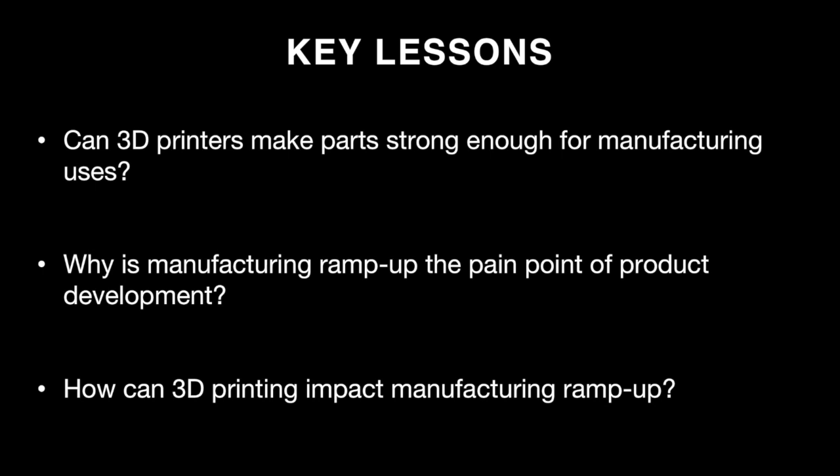The goal of this webinar is to help you understand where 3D printing fits in with regards to preparing a manufacturing line for production. We're going to look at 3 key points: how 3D printers can make parts strong enough for the manufacturing line, why manufacturing ramp-up is the pain point of product development, and how 3D printing can help resolve those pain points to streamline the ramp-up process.

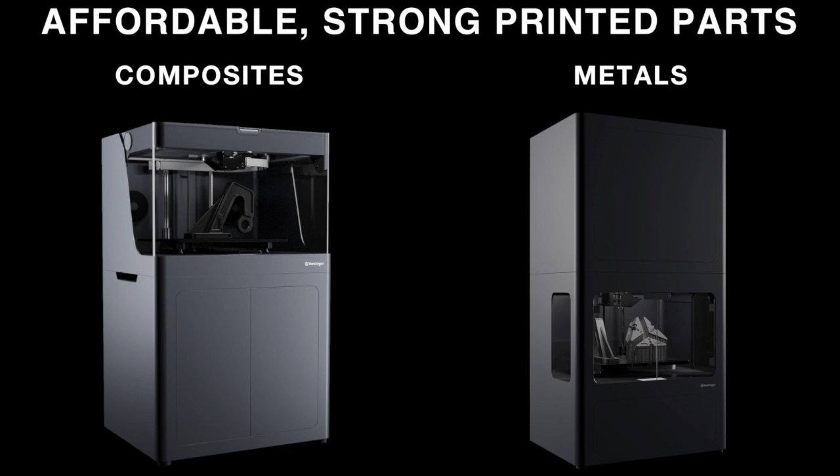First, we're going to go into why 3D printing can be used for manufacturing. A lot of the materials and tools used in manufacturing need to be very tough, experiencing repeated impacts, high temperatures, and lots of wear. Since 3D printing has been around for decades, many people have out-of-date impressions that it's either a cheap way to make fragile parts or a prohibitively expensive technology. Markforged is upending those perceptions by selling affordable 3D printers capable of producing parts tough enough for manufacturing environments, with both metal and composite 3D printers capable of producing high-strength parts affordably and quickly.

So what do we mean when we say strong? Markforged metal printers print parts with strength comparable to that of their base material, 17-4 PH stainless steel, as you can see on the right. On the left, our composite printers are the only 3D printers on the market that embed continuous reinforcing fibers during the printing process to make parts that are 23 times stronger than ABS. This is just as strong as 6061 aluminum.

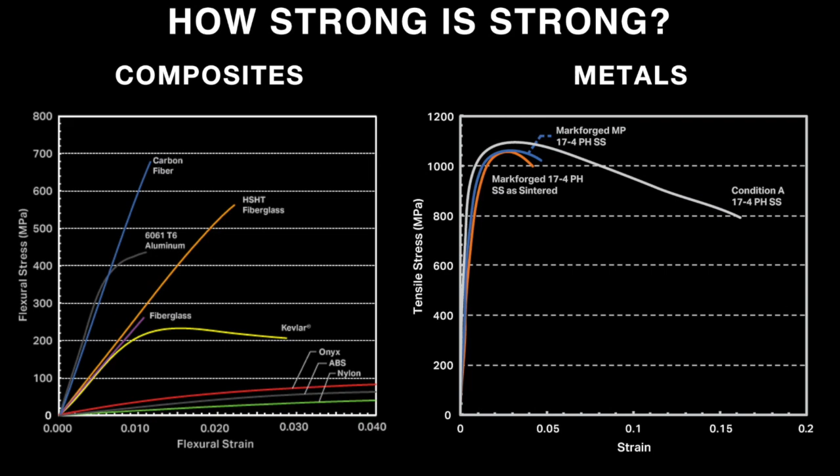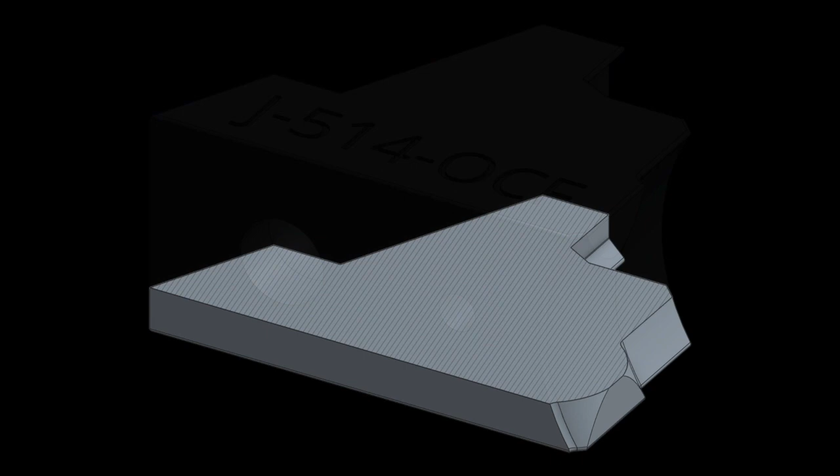Let's take a closer look at how this works. Here's an example of a customer of ours. They use composite 3D printed parts as end-of-arm tooling in their manufacturing automation cells. These gripper jaws experience repeated high-impact loads as they close around thousands of parts a day. Here's the model of the part, and we're going to take a cross-section of this part to show you what our printers can do to it internally.

Here's the cutaway view of the part as shown in our slicing software to describe how our printing process works. There are 2 materials at play here contributing to the success of the part. The white lines forming the shell and matrix of the part are a nylon chopped carbon fiber blend we call Onyx. This material is non-marring and chemically resistant to coolants and machining fluids found in manufacturing. The yellow lines encircling the perimeter of this part represent the embedded continuous reinforcing fiber. In this case, it's Kevlar.

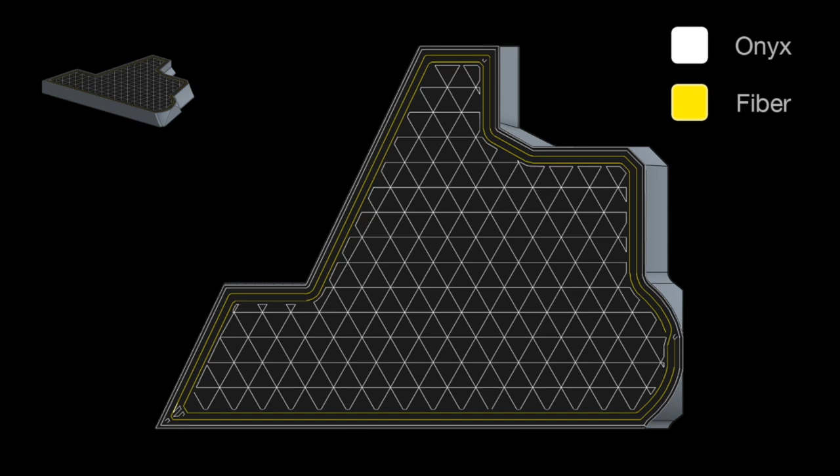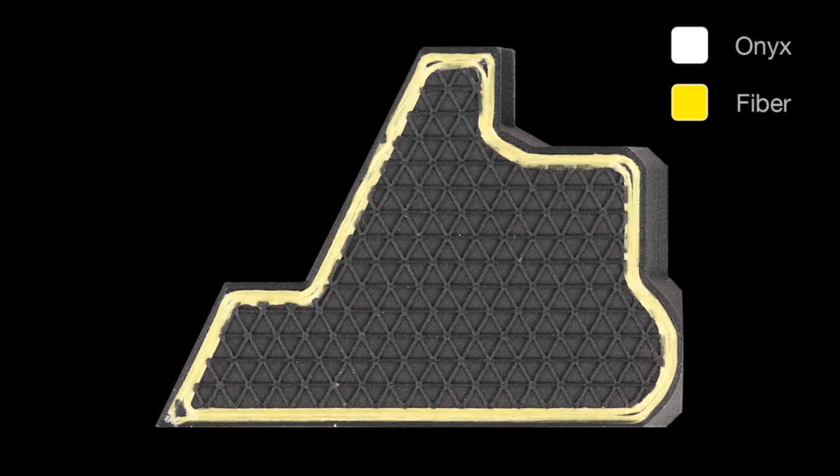Here we have that same cross section but with the real part now, so you can see what that Kevlar looks like in reality. The Kevlar is a continuous strand woven around the perimeter of the part. You can customize these reinforcing fibers and how they're laid out within your part to suit your strength needs depending upon your application. Here we've chosen to reinforce the shell of the gripper jaw because the load from the grippers gets applied on the gripping face of the jaw. The Kevlar fibers on every layer absorb this load by distributing it across the continuous strands, so the continuous strands are the key players in part strength.

With different fibers and different reinforcement patterns to select from, you can optimize your printed part for its loading condition. With these high-strength 3D printing technologies put to work, our customer base has become worldwide, with local service and support from our network of value-added resellers. Our products are trusted by industry leaders in many verticals, ranging from manufacturing and automotive to consumer electronics. Our printers help these companies bring their products to market faster and cheaper by accelerating their manufacturing development process.

Now that we've explained why 3D printing can print parts strong enough for demanding manufacturing environments, let's dive into the pain points of product development. Hardware development starts with a concept. You've identified a need and envisioned a solution. You then take that concept and prove it out with a physical prototype.

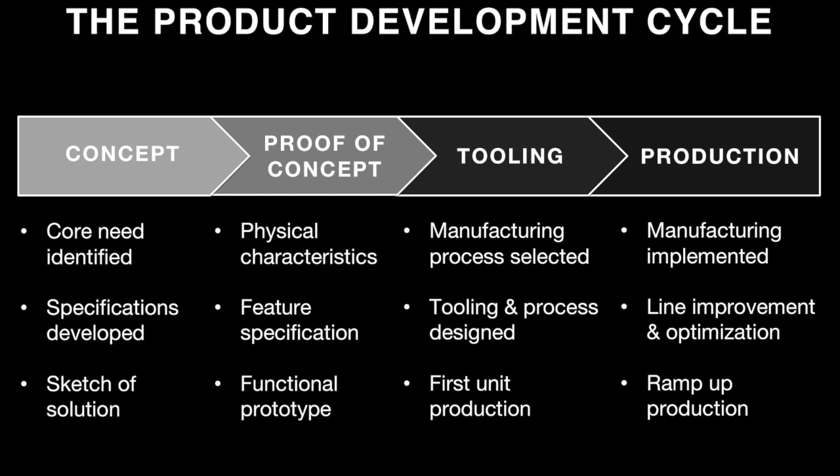Once your prototype looks and acts like you expect, the next step is tooling development. This is where you need to take your single model and figure out what is needed to make hundreds to thousands of it. You need to design your tooling and process to successfully produce your first production unit, and then launch production where you can focus on product and line optimization to increase yield and make more money.

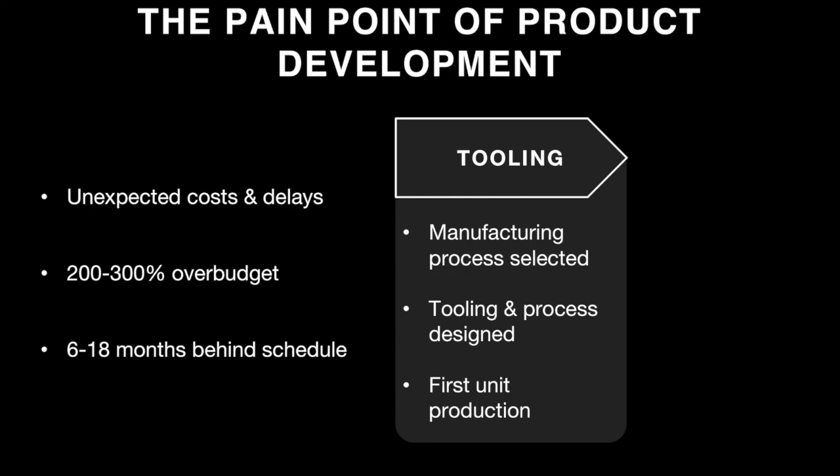So the real pain point of product development is tooling. Ramping up the tooling for your manufacturing line is laden with unexpected costs and delays, is usually 200 to 300% over budget, and can be 6 to 18 months behind schedule. As a result, tooling becomes the most arduous and least efficient aspect of moving your product from your prototype to your production run, and no hardware product is immune to it. Let's dive deeper into why that is.

Here's an ideal workflow for production line development. Numbers and steps can vary quite a bit depending upon the industry, materials used, and the size or complexity of the product that you're making, but these examples should give you an order of magnitude sense for how cost and time distributes in tooling development.

First, you make your forming tools: injection molding, die casting, stamping, things like that, often forming the largest parts in the product like the casings or the housings. These are often the most complex parts of the product.

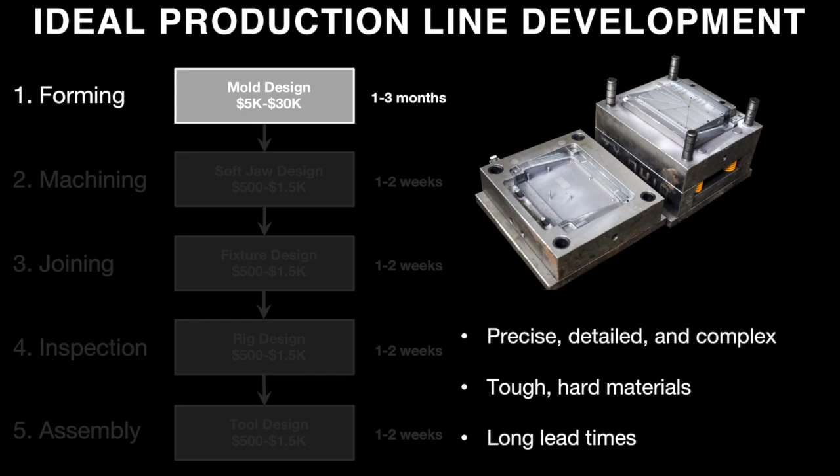Tooling for this step is usually expensive and time-consuming. Parts need to be machined and finished, often by a third-party service, and molds are made out of incredibly tough materials like tool steel so that they can endure the stress and heat of thousands of mold cycles.

The next aspect of tooling development is machine work holding. In some cases, especially with forming processes like die casting, parts need to be post-machined for precision. In other cases, you may have other custom components to your product that just get machined from the start.

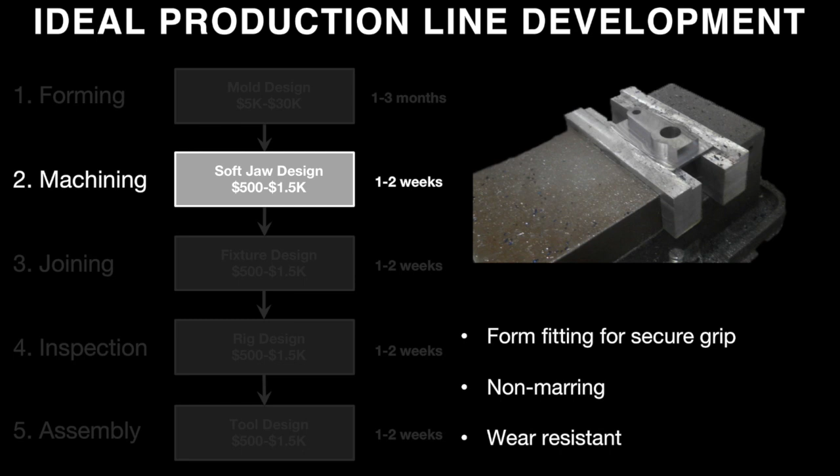These parts all need work holding with a few key requirements. The work holding needs to securely hold the part through many machining cycles without degrading, and the work holding needs to be non-marring so that it doesn't scratch the product.

Our next step is joining. When I say joining, I'm talking about things like traditional metal welding, as well as processes like sonic welding or gluing. Fixtures are often necessary to align multiple components for whatever joining process you use and need to hold those parts precisely and securely during the process.

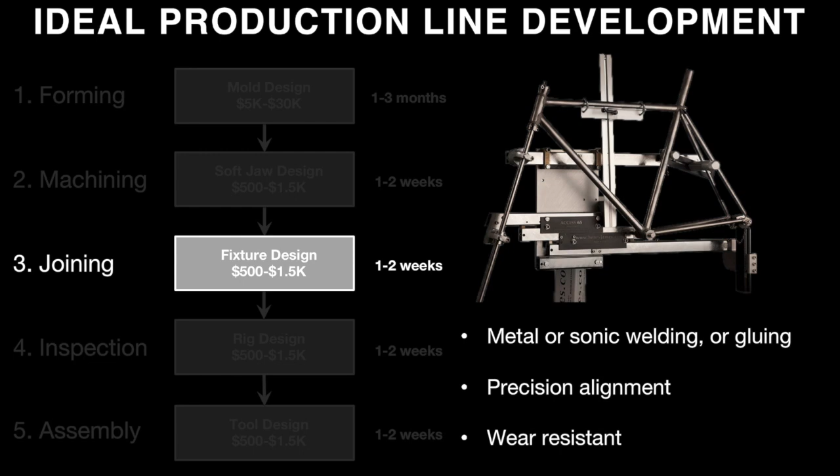So some fixtures, like this bicycle welding fixture, can be modular to account for multiple sizes and styles of frame, while others may need to be highly customized and precise to allow for perfect alignment of components.

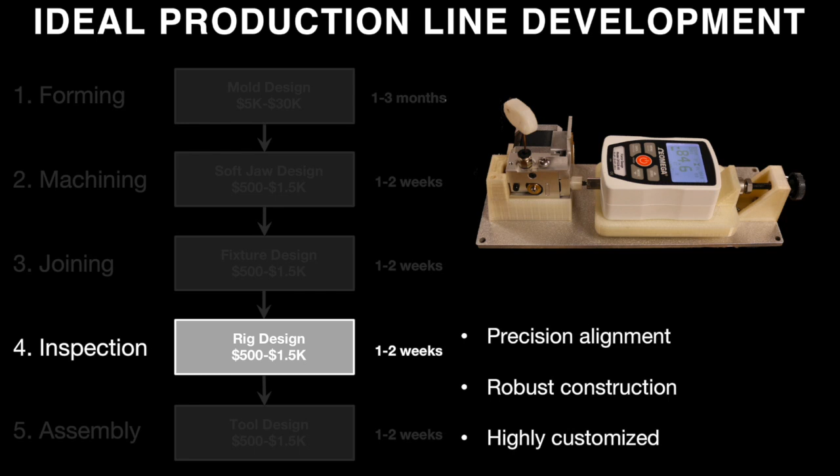So next we get to inspection. Whether you're running products or parts through a test rig for strength validation, or simply measuring a part with a CMM machine to make sure it meets specification, these steps need rigs or fixtures as well.

And now for our last step in the line, assembly. All the parts are made, verified, and now need to get put together. Not everything needs an assembly fixture, but if you want your production line to be efficient, developing custom tools to help assemble your product makes your workers' lives easier and means more products in less time.

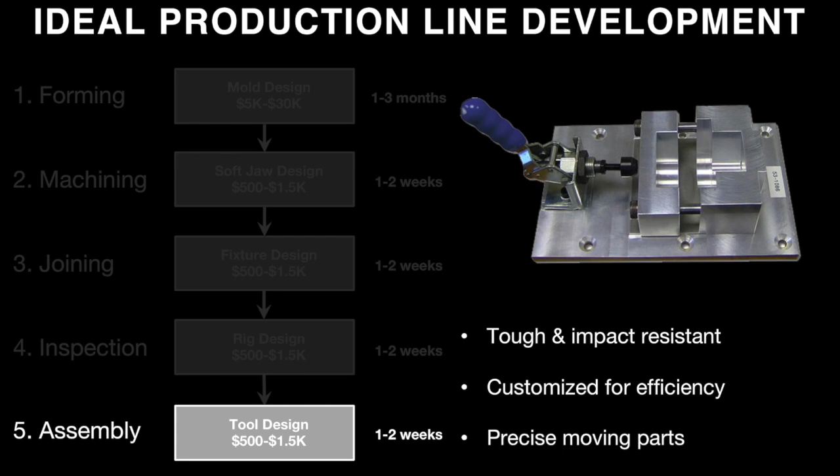This means your line has a higher yield and your products are less prone to assembly issues.

So you may think at this point that you're done. These are the major process steps in manufacturing, and once the tooling for each step is done, you can move on to the next one and get your line running.

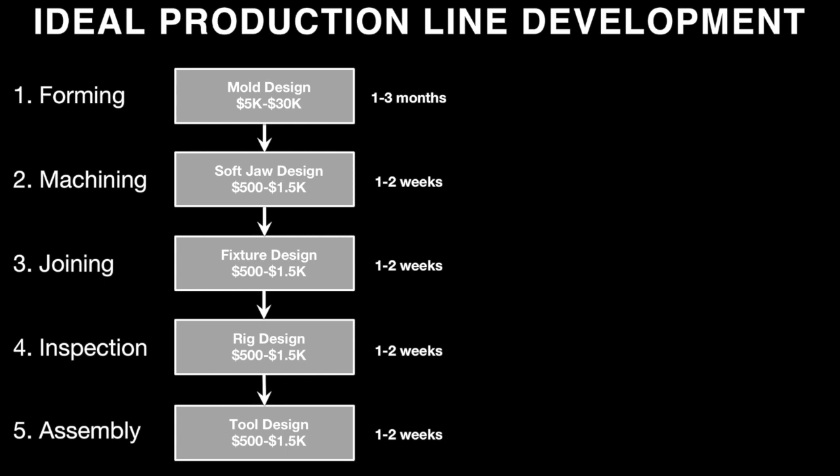However, the big time and money sink and where the big struggle lies in production line development is all in the iteration. Each of these tools needs improvement and fine-tuning to get working right. These iterations are why product launches get months to years of delay and usually end up 200 to 300% over budget.

For example, a flaw in the injection mold design could cause flow issues with how the plastic fills the mold. This means the parts it produces are out of spec.

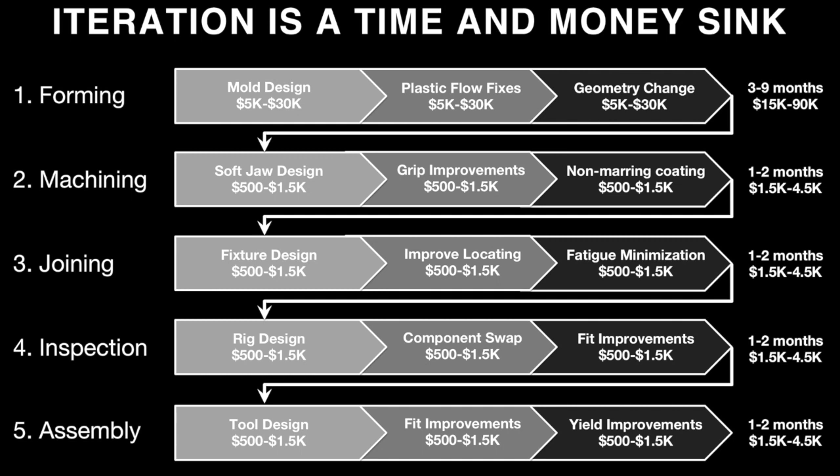Another example, the first revision of an assembly fixture could create a flaw in how some of the products are being assembled. This drops the yield of the assembly line and means that until that issue is fixed, your production line will not be running at full speed.

Sometimes there can be severe issues downstream that require a slight product redesign. For example, a supplier for a critical component of your product could discontinue or update that component. This causes changes to your product and may force you to reevaluate your product's design.

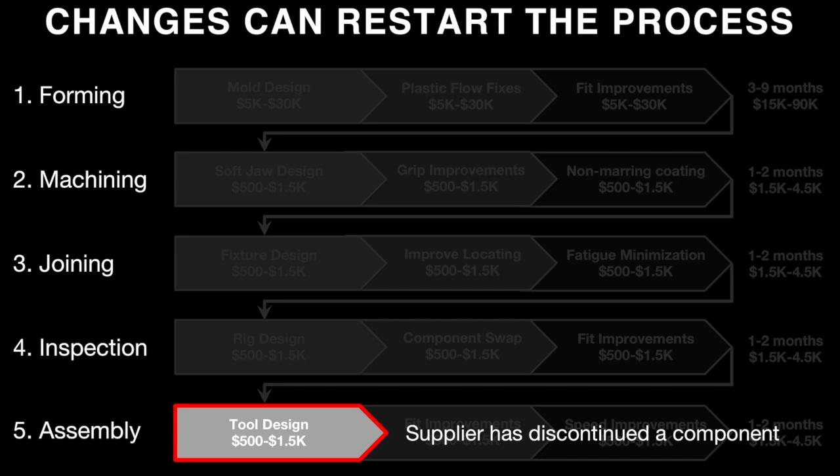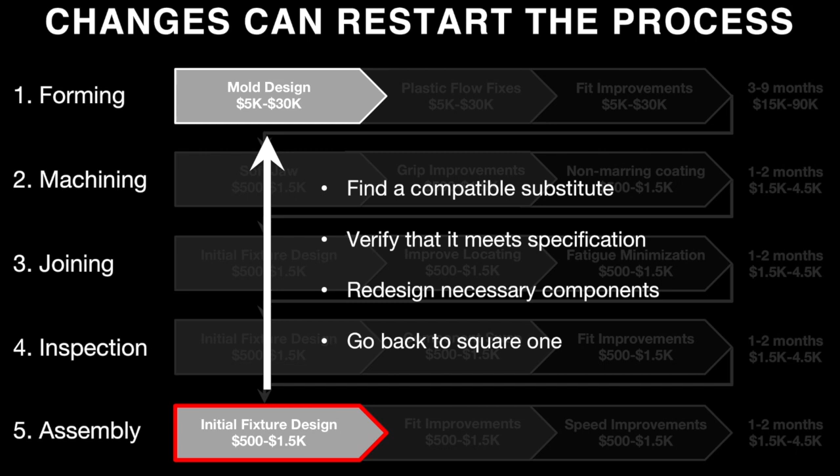And before you know it, you could be sent back to square one. You'll need to find a compatible substitute, verify that it meets specification, and redesign your product to make it work. The whole process change equates to thousands of dollars and months of work that you may need to do all over again.

And there are a bunch of other reasons to get pulled back to square one as well. Supplier changes, alternate subassemblies for product differentiation, or a change in the process that's made after production ramps up. These all create edits to the product that have the potential to restart the process over and over again.

All of these improvements could be critical to your product or could improve its success substantially. However, all of these come at a cost. You need to run through another iteration of tooling design.

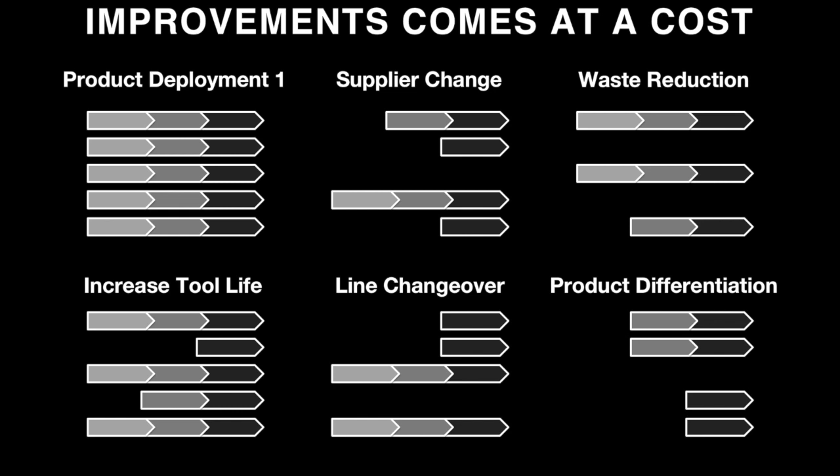In some cases, you may not need to go all the way back to the beginning because you never know what unexpected roadblocks could come up and where, but that does not mean that you are free from the cost of another iteration.

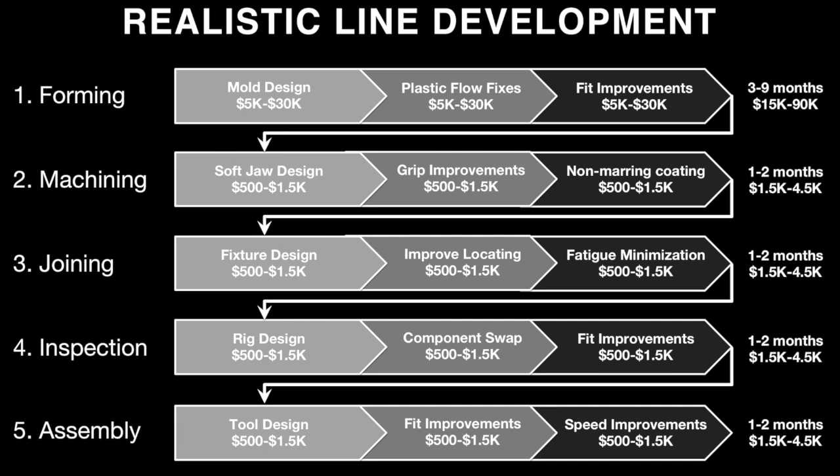So where does 3D printing fit into all of this? We know that high-strength 3D printers with continuous strands of composite fibers can create tooling and fixturing capable of handling manufacturing applications. So now we're going to go into how we can take this timeline and cost estimation and turn it into this: an 80 to 90% drop in costs and going from a multi-year manufacturing line development process to getting your line up and running in months.

We're not removing the iteration steps, as those are still critical to the success of your line. We're just making them more affordable and more efficient. Let's look at some examples.

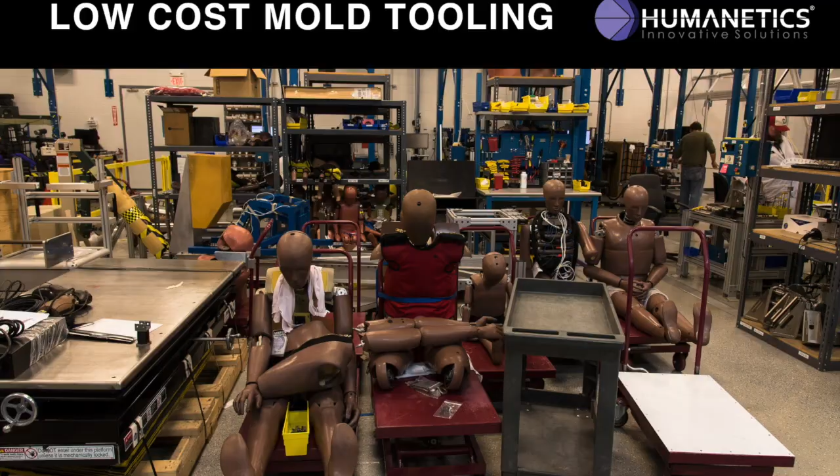So back to the first step of forming. I'm going to talk briefly about a customer example for this one.

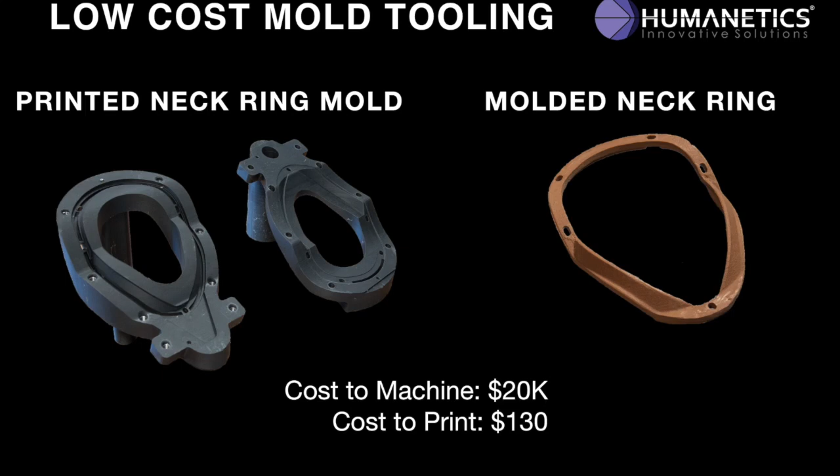One of our customers, Humanetics, makes crash test dummies for safety testing. One of the parts they need to make is the silicone neck ring. They used to have these molds machined, and due to the complex geometry, they were extremely expensive, costing near $20,000 to produce. They can now print continuous fiber reinforced molds for this application for only $130. The printing process makes these molds extremely affordable, and they can have them ready in days. Just for this one part, they've reduced the mold cost by 99%, and the cost and time of the forming tool process drops substantially.

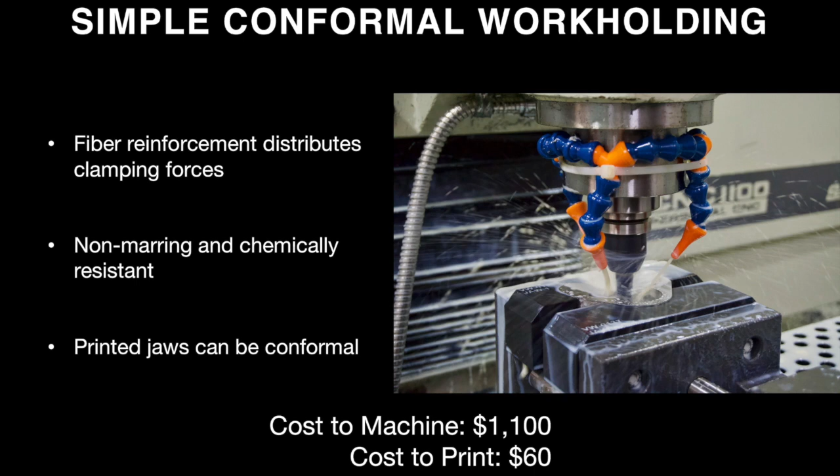Next, we have soft jaws for the machining process in manufacturing. Here's another example: the jaws holding this part are 3D printed and reinforced with Kevlar, so the clamping load distributes around the fibers and holds the part securely. These jaws are non-marring and tough, so they don't scratch the parts, and are conformal, matching the curvature of the part being machined for a snug fit that endures many machining cycles. Normally, conformal jaws are a compromise because they entail higher feature complexity when machining, which increases cost substantially. Here we can save about 95% on cost, and these can be printed overnight, cutting the machining work holding iteration process down by that much as well.

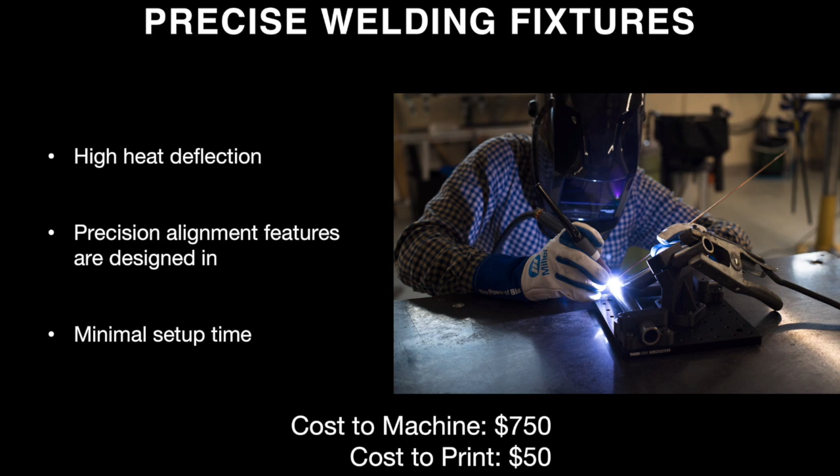Next is joining. The high heat deflection temperatures of our composite parts make them suitable for MIG and TIG welding, and precision alignment features can be designed into these fixtures to help with component alignment before the process. This can be done for gluing and sonic welding as well. Custom joining fixtures reduce setup time and ensure precise alignment with custom features, so these costs drop as well. Even if you're using 3D printed components for just the first and second iterations of your fixtures and machining the final version as you refine the process, you're still saving thousands of dollars and weeks of time integrating 3D printers into your manufacturing ramp-up workflow.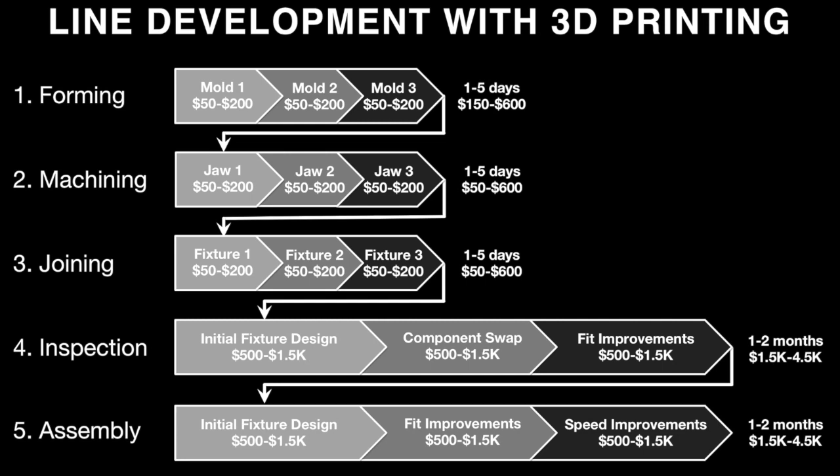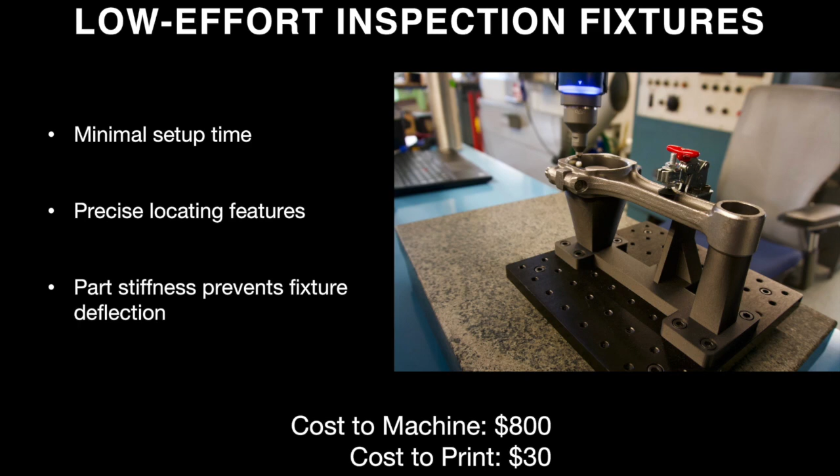Next is inspection. Traditional inspection fixtures are usually very generic and can do a lot of different things, but have a high associated setup time. With our printers, you can design standalone inspection fixtures that eliminate this setup time and precisely locate parts to obtain accurate measurements. This also relates to testing rigs if your products need to undergo testing for quality verification. Our printers can help here too, providing high strength parts for testing rigs next day, which again drops the time and cost.

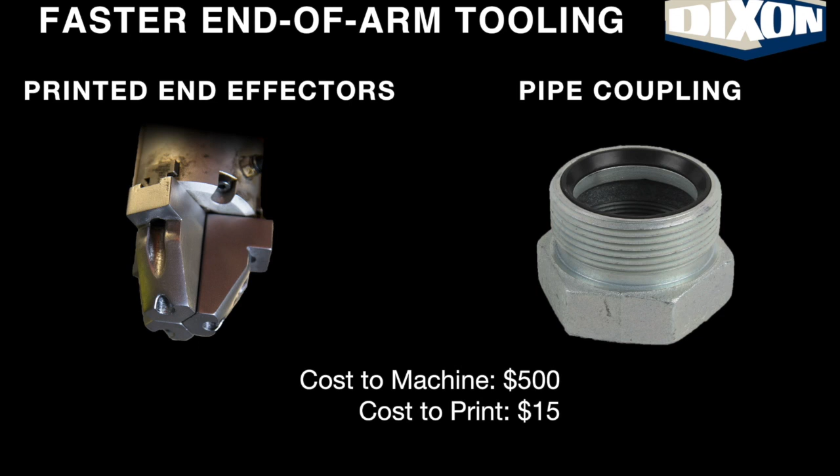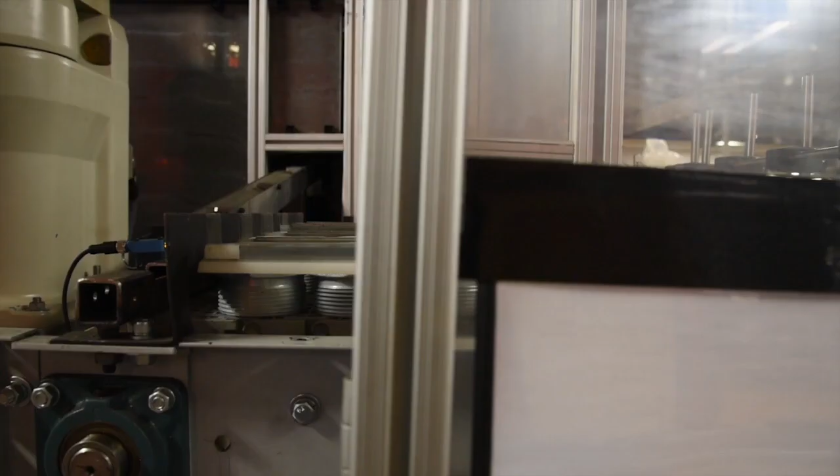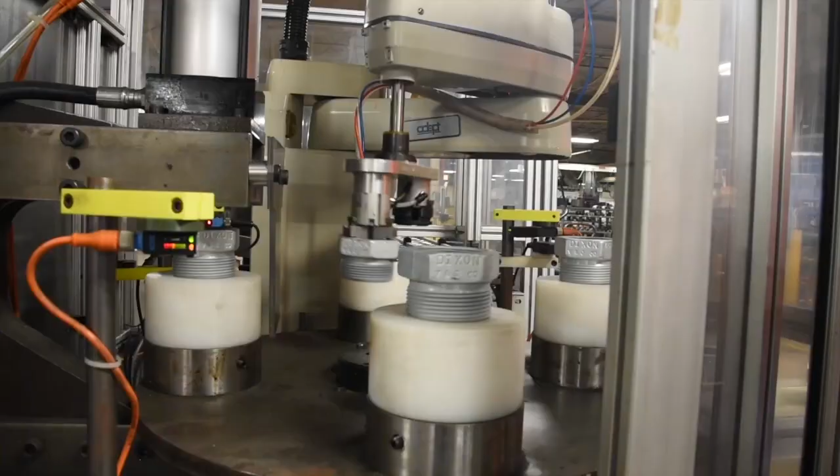Our last stop is assembly, and we'll share another customer example. One of our customers, Dixon Valve and Coupling, uses our products to simplify ramp-up of manufacturing lines for new products by 3D printing end-of-arm tooling for their automation lines. They create pipe couplings that have a gasket pressed into the top, and Dixon Valve uses these metal printed end effectors to pick up, place, and put down the threaded couplings in their manufacturing cell. They can get these jaws turned around in days instead of waiting weeks for parts to return from the shop, and the 3D printed metal grippers are lighter than traditionally machined jaws. This means they can both ramp up their line faster and run it faster, producing higher yield and getting the line up to speed in less time.

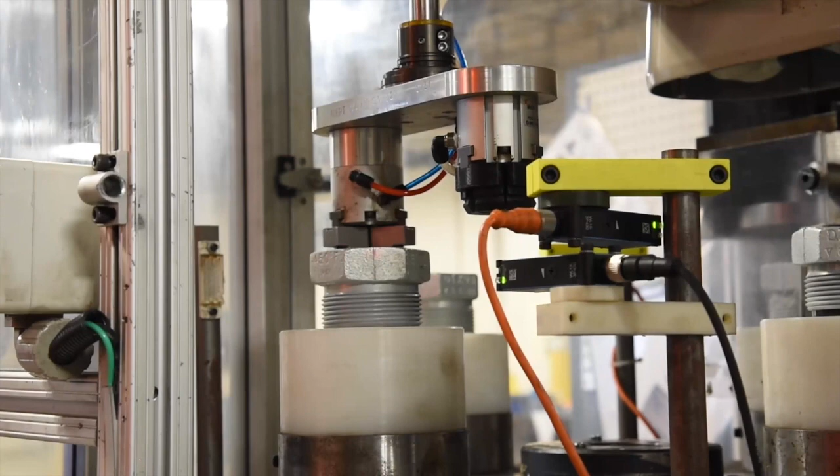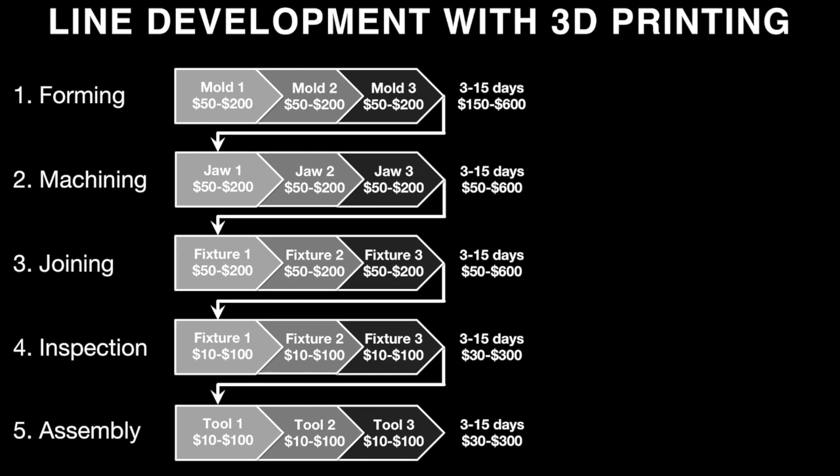For each project in which Dixon Valve incorporates high-strength 3D printing, they save roughly $35,000 because they cut down on all the iteration cycles and associated costs across their entire line. Their costs can drop from thousands to hundreds, and their iteration cycle drops from weeks to days. This means they can get new products out to market faster and for far cheaper than they did before using traditional methods.

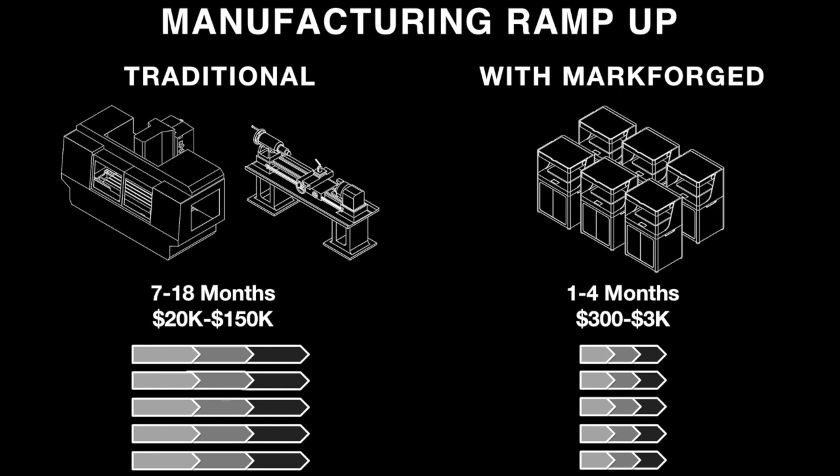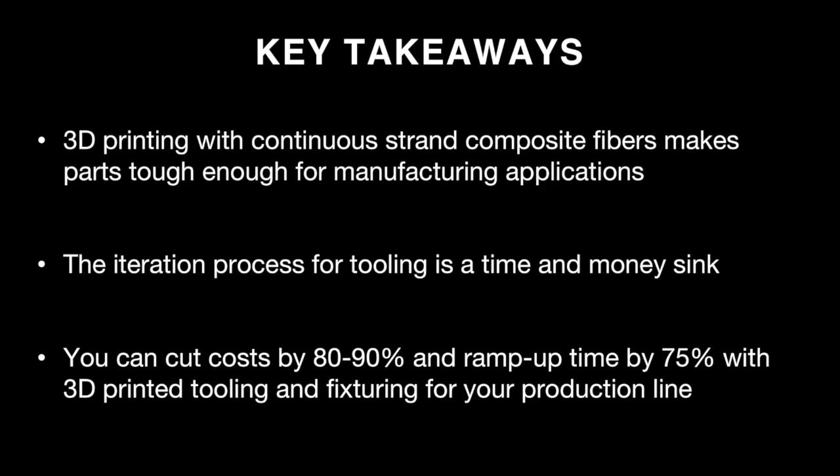So in general, comparing traditional manufacturing ramp-up of long lead times and high costs to using 3D printing for making your tooling and work holding, you can introduce substantial savings to your product line. Engineers spend half their time waiting for parts to come in. With Markforged, you can print them out and install them on your line next day. 3D printing with continuous strand composites or metals can provide an avenue for affordable, same or next day strong parts. By 3D printing your tooling and fixturing on your manufacturing line, you can cut costs by 80 to 90% and decrease your production line ramp-up time by 75%.

So that's how investing in 3D printing can streamline your manufacturing ramp-up process.